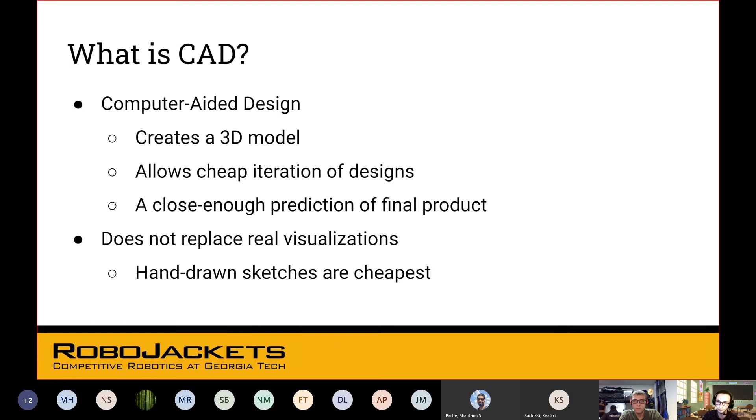So let's talk about some CAD terminology. These things are organized in the order of a typical design — you usually go from a sketch to a feature to a part and then to an assembly. But what do these mean? A sketch refers to the lowest level of the design, usually a 2D element that can be used to define features later on.

Features are 3D aspects of a part — elements like holes or cutouts — and they help define the function of a part. A part is a collection of features and sketches that represent a real thing, like a spring in my pen or a screw in my headphones. And an assembly is a bunch of parts stuck together by defining characteristics, usually by faces or edges — that would be the entirety of the pen or the entirety of the headset.

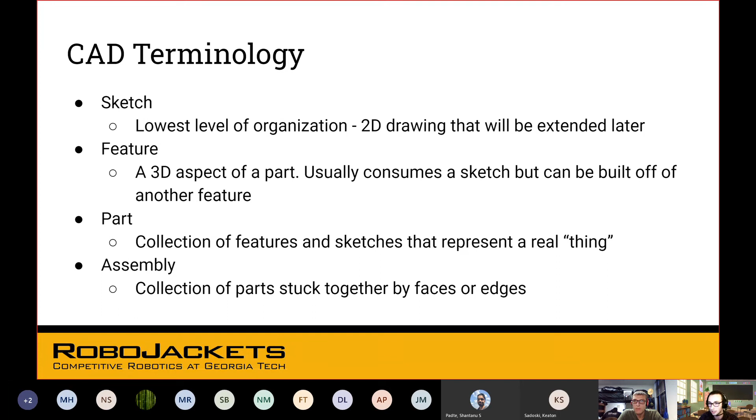So for the CAD space, the workspaces in most CAD software are 3D, so they're XYZ coordinate planes like in geometry. All designs in the world make use of these small, simple geometric shapes like circles and squares. If you think about the defining characteristics of a wheel axle, it would be circles, and plates are defined by a bunch of rectangles. So you can start to build these complex designs with simple geometries that are either built up into something more complex, or taking a complex geometry and breaking it down into a series of simpler ones.

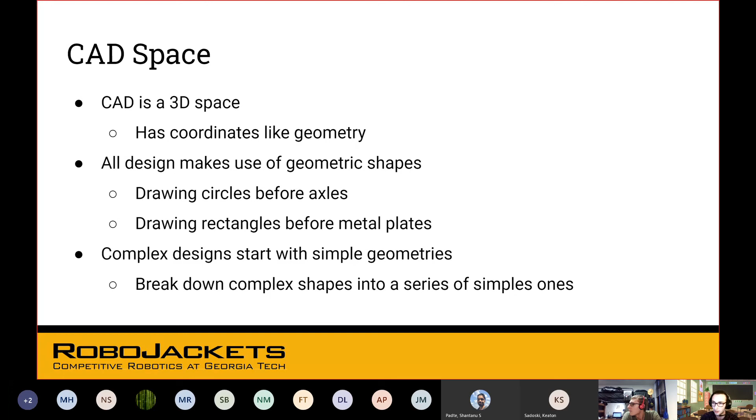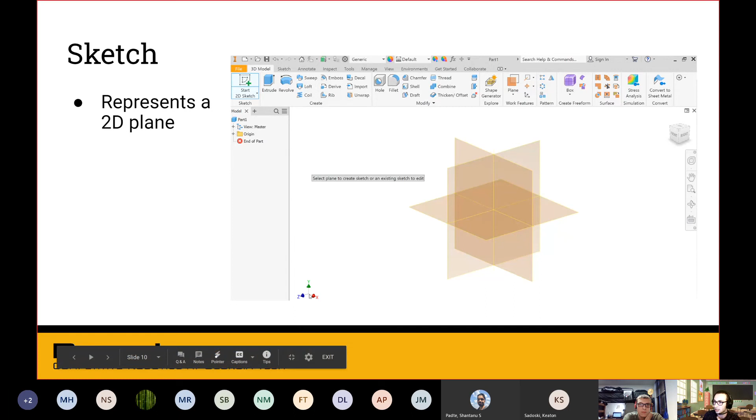Here's an example of the screen you'd see when you start a sketch in Inventor, our CAD software. You'll see this weird looking 3D element in the center - this is a bunch of planes intersecting each other at the origin. In some CAD software they're referred to as top, right, and front. I think in Inventor they're defined by the coordinates that are tangent to them, so this would be like the XY plane.

Sketches are 2D elements, so they need to be put on planes like these - they need to be defined by planes. It's usually a good idea when you start a sketch or start a part to use one of these as your first sketch plane. You just click sketch in the upper left-hand corner, and then click on one of the planes to help define it.

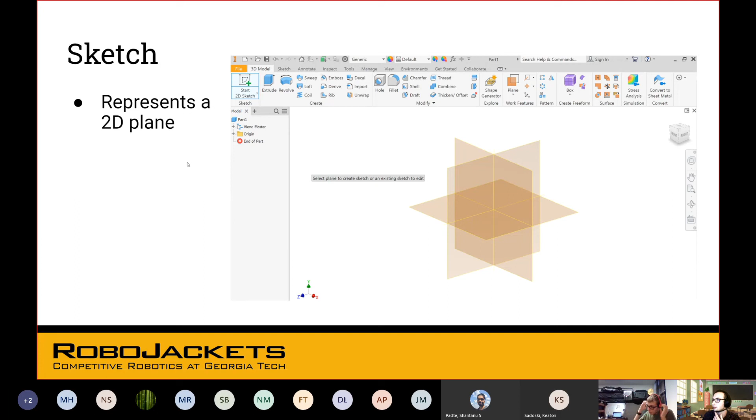Computers are really, really smart idiots - they will do exactly what you tell them and not much more. This is especially true for CAD, and the way you help the computer figure out what's going on is called constraining. Constraining is the act of defining some measurement or relationship in the CAD, like this line is 3 inches long, these lines are parallel, or this angle is 10 degrees. If you don't help the computer understand what you're trying to design, it can really mess you up later down the line.

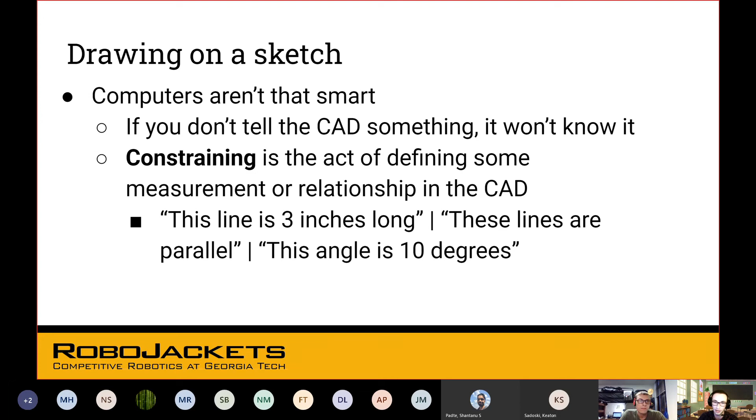This is a quick GIF of the beginning of a sketch, drawing a quick rectangle. You can see they click the sketch option in the upper left hand, and then click on one of the planes that comes up - they click on the top plane, or I think it's the XZ plane here. They grab the rectangle from the top left and define it at the origin, then drag it out to an arbitrary point.

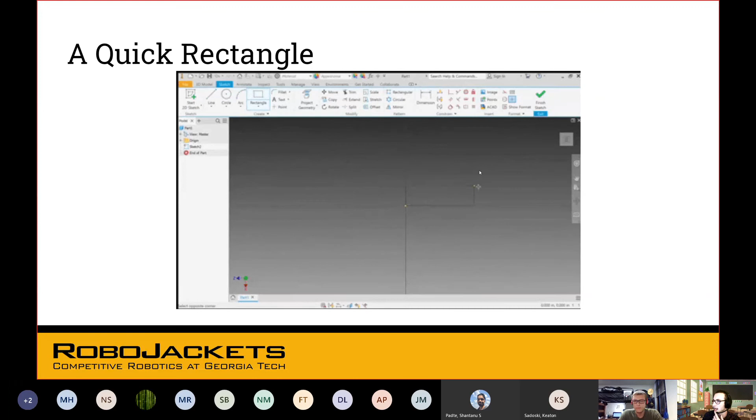You might have noticed the colors of the rectangle were different on some of the sides. This is Inventor's way of telling you what it knows and what it's guessing right now - in this example, blue is known and green is unknown or free. This changes across CAD software and versions, but they all follow this idea: it's trying to tell you, okay, I know this corner is attached to the origin, but I have no idea where this free side is moving. So it could be anywhere right now in your design.

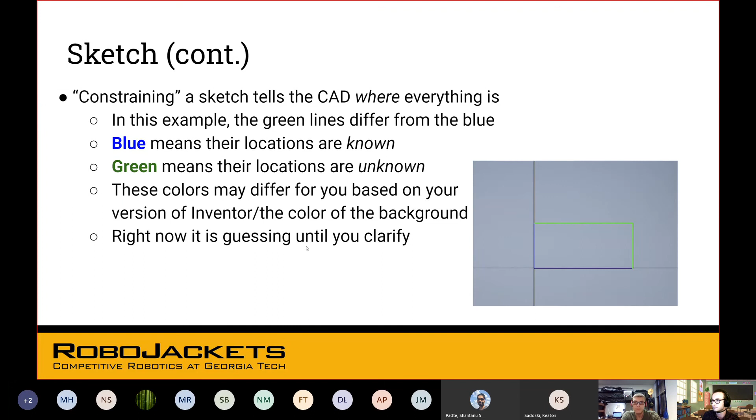There are a couple ways of constraining these things so that you can tell Inventor what they are. These will be covered in other sections, but the important thing right now is that it's important what constraints you use - you want to make sure the way you defined your part is in line with how you will use it. We'll go over some of these later, but for example this is coincident, so 2 points come together, and this is collinear, so 2 lines on top of each other. These all help define parts of the sketch so you can better understand how it works later.

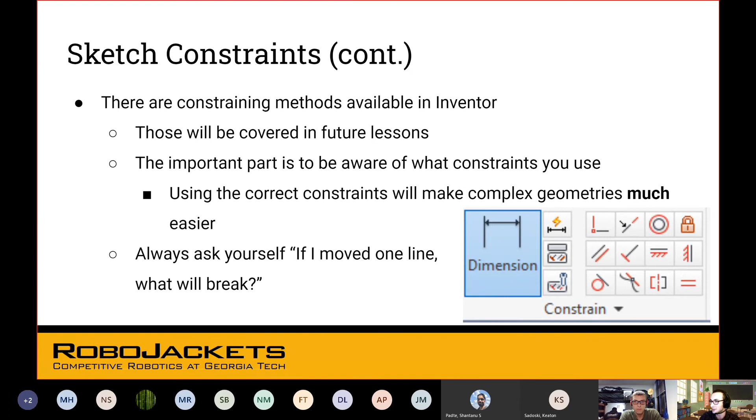A common trick a lot of people use in CAD is: how will a part change if I move one thing, and if it changes in a way I don't want, how do I add a constraint there to fix it? I also often use a trick where if I have a sketch that's undefined and I don't know what needs to be defined, I'll just grab a part and move it and it will break. But Control Z exists for a reason, so we just Control Z and figure out what's going on.

So how do we fix it? How do we get rid of these green unconstrained free lines? One way to do it, for this example, is to define a green element in terms of another known element, like an axis, a plane, or another blue position.

It's pretty hard to see here, but they define it to one of the axes that we know. We know the bottom left corner of the rectangle is on the origin, and we have this line that follows that, so we know that is on this plane. We say the height distance from the bottom line to the top line is 3 inches, and it becomes blue because now it knows where that height is.

We still don't know what this one on the right side is, so this dimension is still free, so it could slide. A good flow to follow is: you want to sketch, then constrain the element in different ways like parallel or perpendicular, coincident, anything like that, and then dimension it. This is the best practice to avoid errors in the future.

Pretty often in RoboJackets, you're doing something, you're in your flow trying to figure out what's going on, and something breaks and you don't know why. That's a common occurrence that has happened to all of us. If there's something going on with your CAD and it's not constrained and you don't know what it is...

You can always use show degrees of freedom by right-clicking on the sketch, and it will show you the ways that the sketch can move in red arrows.

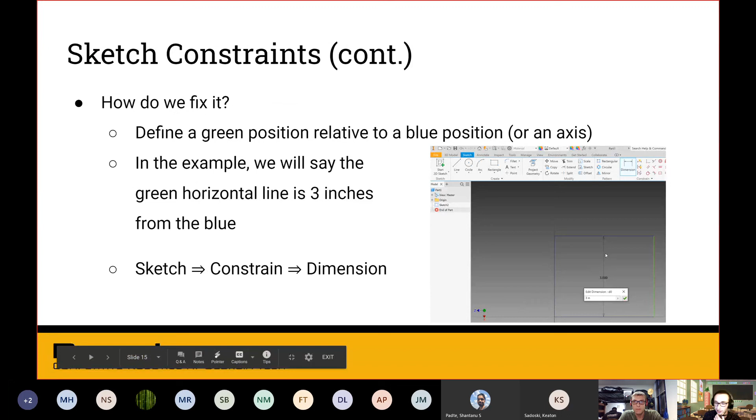So all I would have to do for this one is right-click on the sketch and ask, where can it move? For this, if I right-click on this sketch and say show me degrees of freedom, it would show that you can slide in this direction right now because you haven't told me how wide you want your rectangle to be.

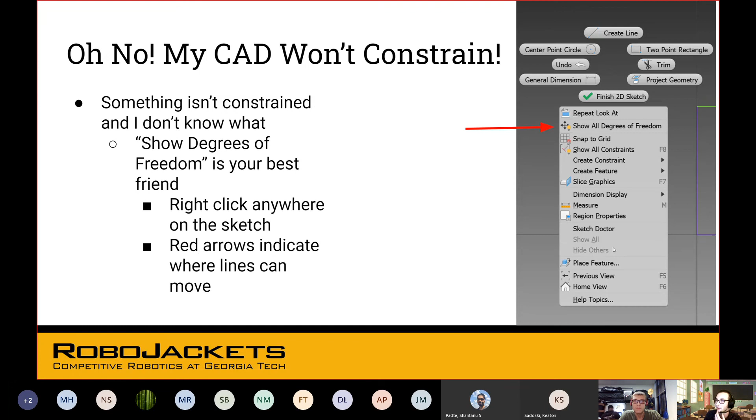That's a really useful tool. Fun fact, I didn't know about it until we went over training for this, so that's fun. So I'm going to be using that now.

Okay, so we talked about sketches. The next thing that we do is we use the sketches to define features. Features are 3D elements of a part made by manipulating a sketch.

Some common features are extruding. Extruding is the one you'll probably use most, very, very common. Imagine dragging the piece of paper with the sketch on it in one direction to make a 3D shape.

Another way to look at it: did any of you have those Play-Doh toys where you'd stuff a bunch of stuff into it, then squeeze it and it would come out as a long star or a moon shape? That's very similar to what an extrude does, where you just take the profile and stretch it.

Another one is revolve. This is really similar, except when you take the sketch, you rotate it around an axis instead of just bringing it up, so it makes a circular shape. I don't have a fun Play-Doh one for this, but maybe I'll think of one.

Sweep - I don't want to spend too much time on this, it's pretty uncommon. It's when you drag a profile along a curve. That's good to make something like a paperclip - you take that circular profile and drag it along the curve that would define the bends in the paperclip.

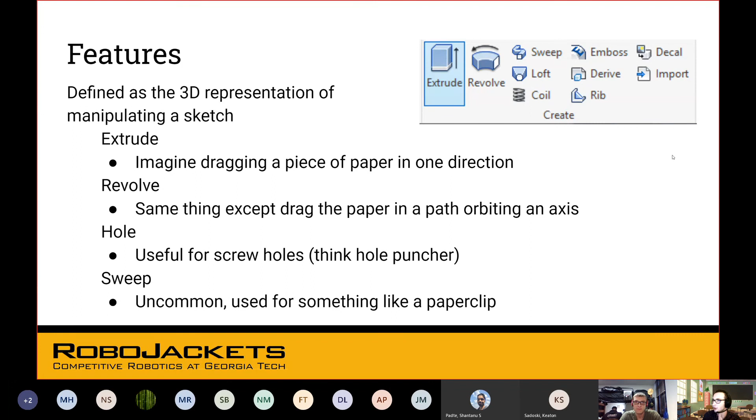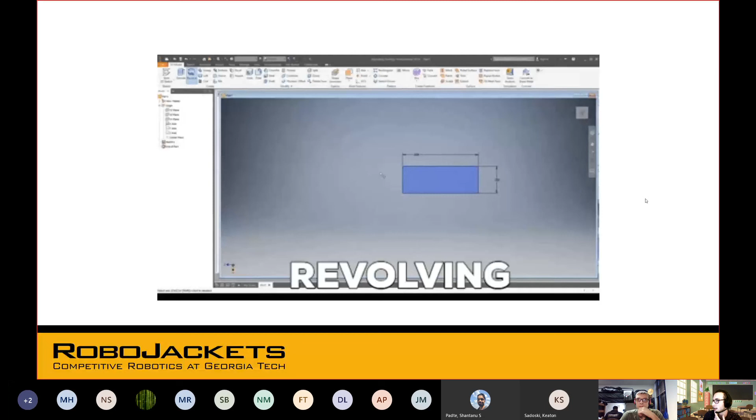This is revolving, right? So they select the profile they want to revolve. They then select the axis they want to revolve around. And then there it is - it rotates around the axis to form a circle.

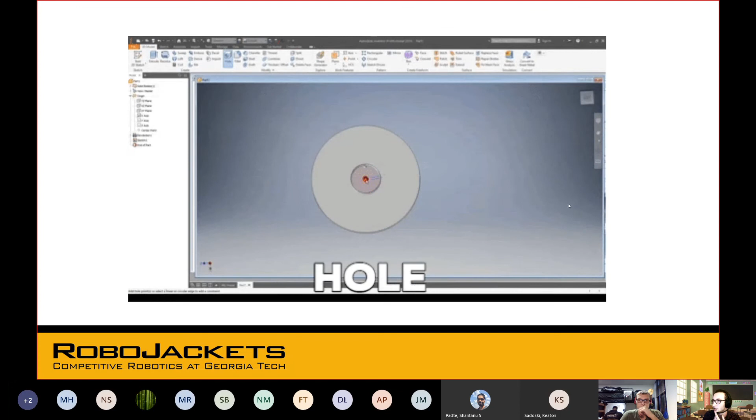I doubt they show sweep here. Oh, they do show hole though. Nice, so the hole tool defines a diameter of the hole you want and the depth. So they have the base defined, and they just click on the center of the circle - that's already a point defined by the axis. There's a little point here. They click on it, and now they have a hole there, defined by the axis.

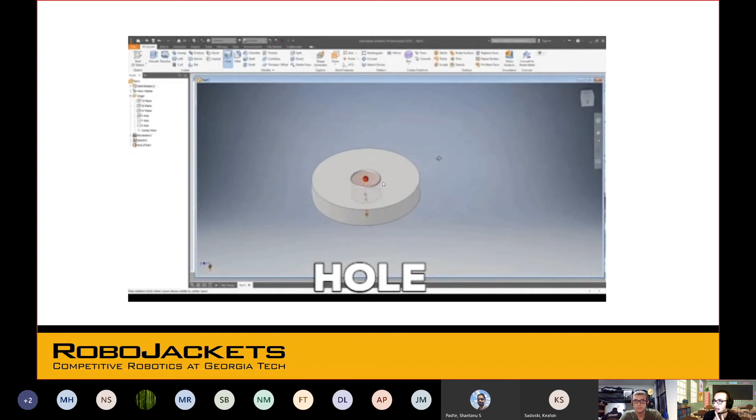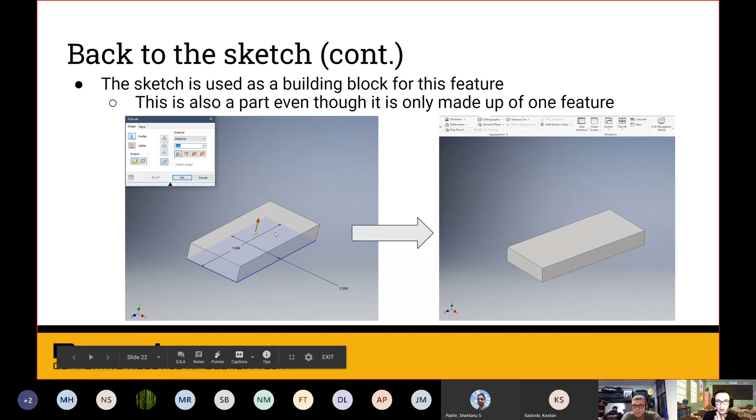Creating a rectangular profile with the previous sketch we get - okay, so this is back to the sketch. The building block of features are the sketches, right? The first thing you focus on is the sketch - you have it define the features. So they have a fully defined rectangle here. They extrude it up into the square or rectangular prism, and now they have a base for more features, more sketches, things to build off of.

So parts - these are just a collection of features. They will end in an IPT file, which stands for Inventor Part File. And now you might ask, where does the T come from? It's probably from the T in part, but that does keep me up at night - like, Inventor Part File with an F.

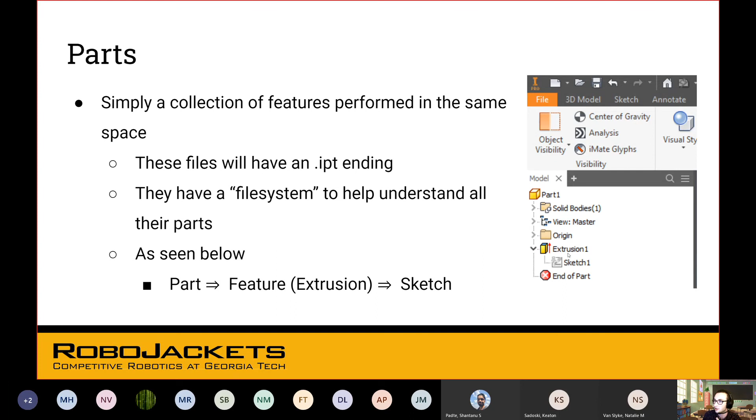Yeah, I don't know. So there's an example model tree on the right side here. This helps you keep track of your designs in CAD, and they're organized in like a folder format, which we'll get into a little bit later. But basically, the largest thing that holds it is a part, and then under that in the folder would be like an extrusion or a feature - so this could be an extrusion, a hole, a revolve, anything like that. And then under that feature is the defining characteristic, which would be the sketch. So the sketch defines the extrusion or the feature, and the features define the parts. You can go up like that as well.

So this is where it all comes together, and you get to see something like the bot we see on the right, which looks like an Undercutter from BattleBots. Keaton can correct me if he knows the name of the bot. It's a Valkyrie, right? It's Valkyrie. Okay, there you go - if you're on BattleBots, that is one of the bots from this past year.

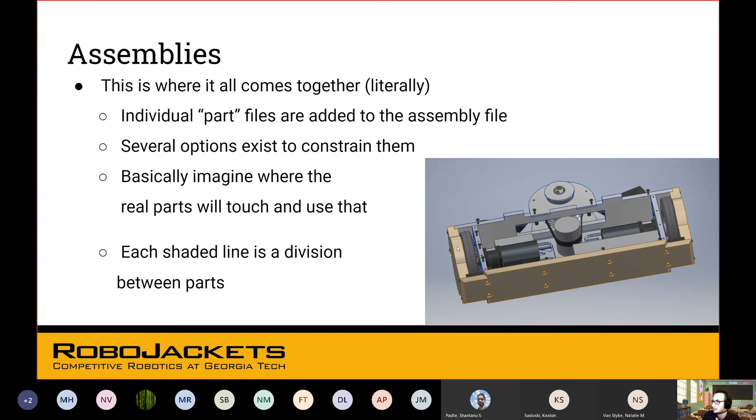So we take all our part files and we constrain them together, and there are a lot of ways to do that, which we will cover in another session. Almost always the best method for constraining a part is based on its real interaction with other parts. A good way to follow it is to imagine where the real world parts would touch and use that as your defining feature. If you look at this example, you see some shaded lines between different elements - those are dividing features of parts. So this back plate would be a part, separate from these side panels because you can see these separate lines, and they're separate from the front panel as well.

So just an overview of some of the things we learned today. We'll be using a CAD software, a computer-aided design software called Inventor, Autodesk Inventor. The best design flow is to start with a sketch, constrain it, and then dimension it. We want to use constraints to talk about its design and why we want it there, then dimension it to fully define it. Then we take the sketch and define a feature with it. We can continue defining features to create a part, and then take those parts we've created and assemble them into a final product.

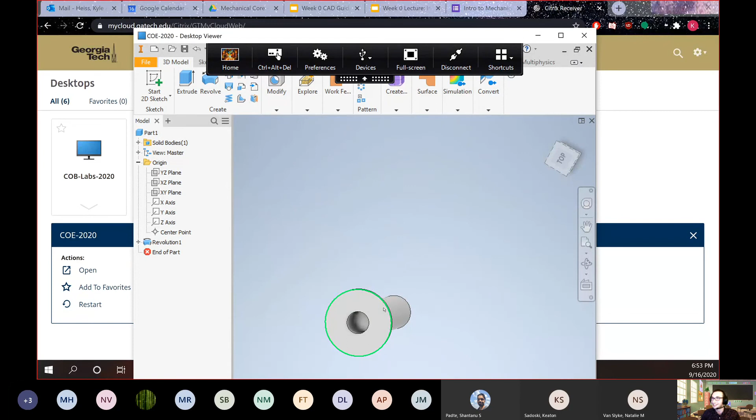There you go, and you see I already have the part made. We're done, that's it. No. But if you go here, I'll close Inventor so I can show opening it up. If it will let me. Please. I just want to close your program. There you go, so I'll say no, because we're going to do it together.

You should see this screen, or one very similar, with the gray background. Just double click on Autodesk Inventor and it should open up. So back to the CAD guide. If you have any trouble with that, let me know, or post in the chat, and Sean and Keaton will help you out.

So I showed this: you go to mycloud.gatech.edu, you click on COE 2020, you open it up, and we get ready to go.

If you want to do a local installation on your computer, I don't do it because it's too much space for me. But if you have a fast computer and you want to always have access to Autodesk, just go to this link. If one of you guys can post in the chat, if you haven't already, please do.

You go to that link, you create an account. It could be your personal email, it could be a gatech.edu, it could be whatever you want. You download the educational license for your system, and we'll be working on 2021 this year. It's a pretty beefy file, and Autodesk also installs a lot of material packages and other elements onto your computer. So saying it takes several hours to install on some of the dorms' Wi-Fi is an understatement.

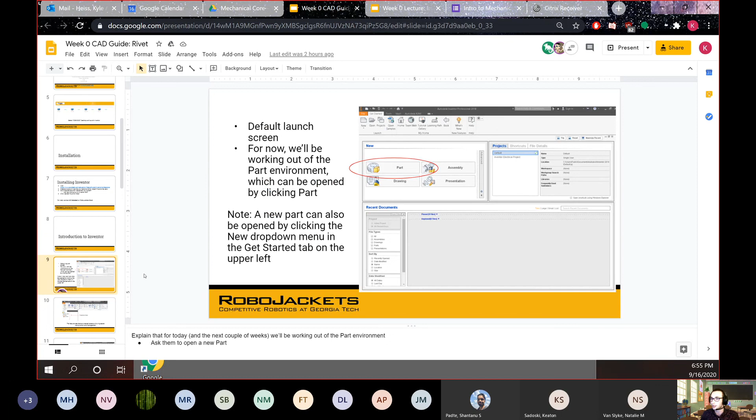Okay, I'm going to take that as a let's go right into it. So how am I going to do this? I'm going to have my CAD up on this screen and the presentation over here.

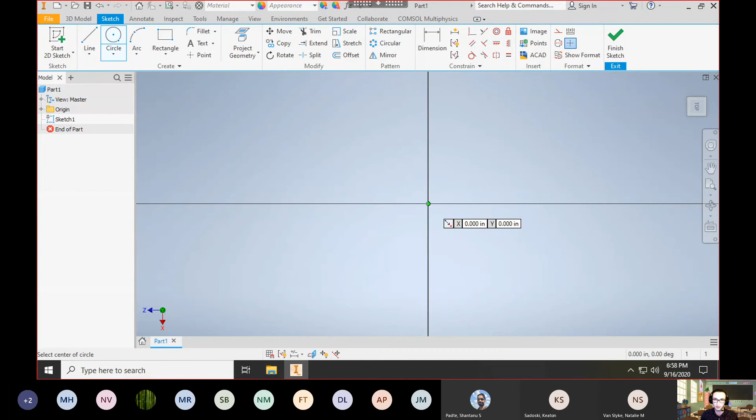We're going to click on the origin. So you see how I'm just floating around in space, but when I get close to the origin, it clicks in and it's green. That's Inventor's auto assist, and it's telling you, oh, this is where I want to place it. I want to place it at the center of the screen. So I'm going to click once it's green.

You can see that it allows me to drag and define this dimension freely. So I'm going to make it real big. It is not dimensioned right now, right? So we see that it's blue. So we said the blue is the, well, actually, hold on.

I'm going to dimension it. And we're going to set it as, let's see what it says, 3/8. So if you didn't follow what I did there, I clicked on dimension up here.

Okay, so in this version of Inventor, blue is undefined and black is defined. So you saw right here, it's blue. That means this is free to move. I haven't set it to be a dimension, right? It knows where its origin is, but I don't know what its diameter is.

So I'm going to go up here to where it says constrain, right? And I'm going to add another constraint in order to make it fully defined. I'm going to click on this, and I'm going to set a dimension. So we're going to set it as 3/8 inches.

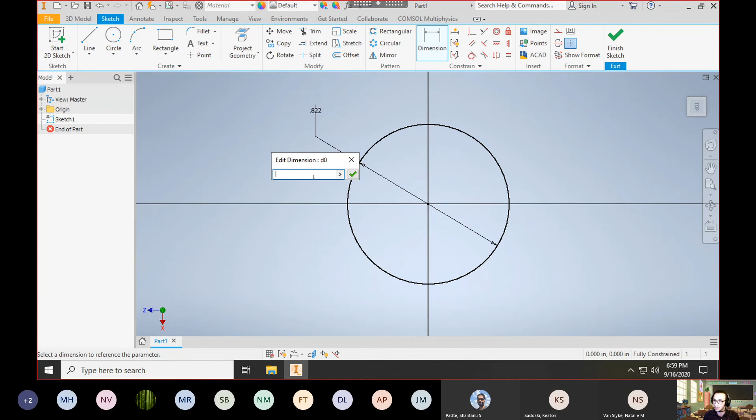And Inventor is really dope. So if you don't know what 3/8 inches is in decimal, you can just be like, oh, 3/8 inches. And there you go, it's got it for us.

The next thing we're going to do is we're going to define another circle inside. So we're making like this hollow tube that's at the center of a rivet. So we're going to grab another circle. We're going to again put it at the origin. And this time we're going to put it inside the axis of the circumference of the other one.

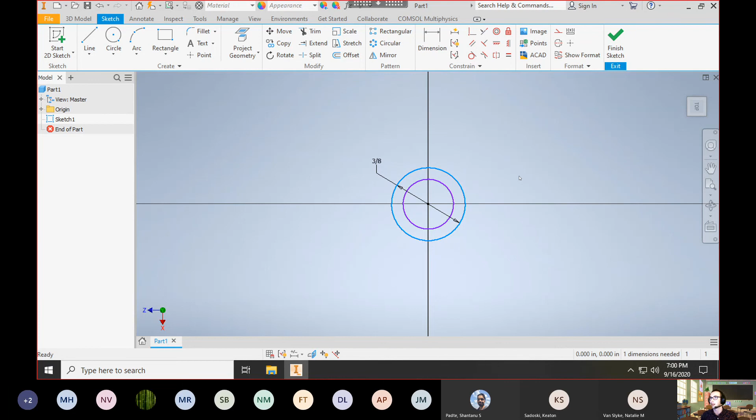Now, so remember, I said there were multiple ways to define a feature. You can either define it by its distance to axes, planes, or points, or you can define it by other already defined points. So for this one, I know the thickness of the rivet I want.

I want it to be a 1/16 inch thick rivet. So instead of defining it as a diameter, I'm going to take the dimension and go inside, clicking on the smaller one first and then the outer one. Now you see I've defined their distance to each other of the two outer profiles.

So I'm going to go in here and do the same thing. I don't need to know what this decimal is, and I'm going to define that distance. You can do the same thing by clicking on the outer one and then the inner one, whatever you want to do.

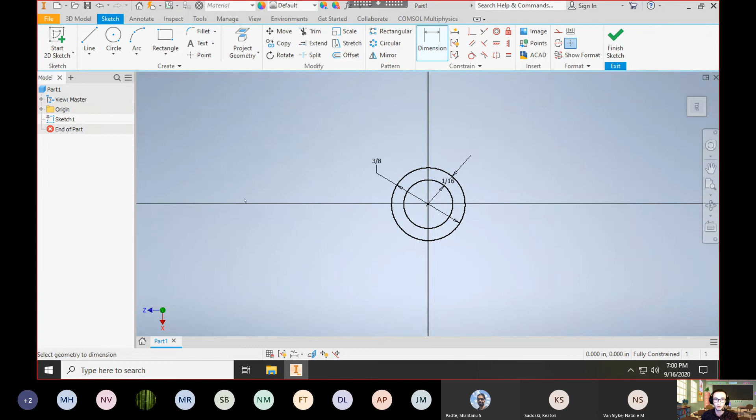That is going to define the inner tube of our rivet. Once I'm done with the sketch, I go up here and click Finish Sketch. It's not going to let me extrude the profile until I finish the sketch. So I say, I'm good, this is what I want. Check it over, I'm done.

Next thing we're going to do is make the tube portion of the rivet. So I'm going to click Extrude, and the first thing Extrude's going to do is ask me to select a profile - what I want to push out with Play-Doh, right?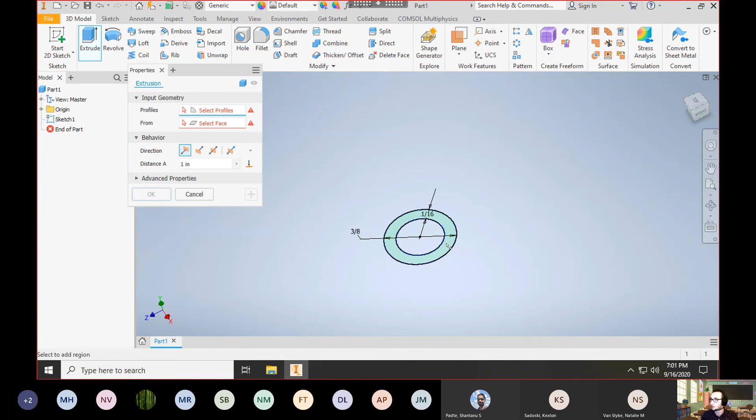So you see that I have an option to do the inside. I don't want that, I want to do the tube. So I'm going to hover over just the part that would make the tube, and click it. It's going to ask me for a distance.

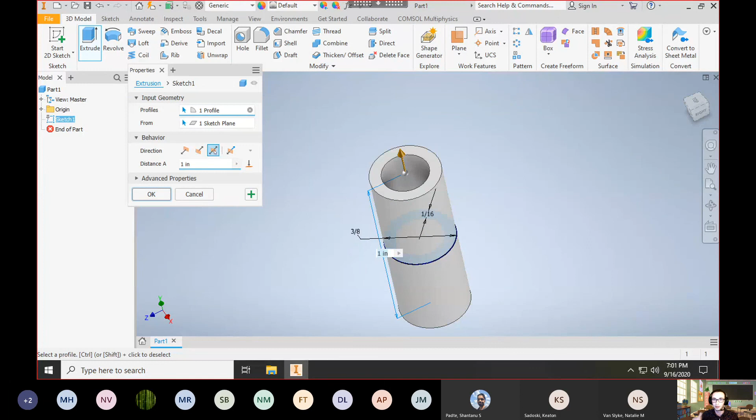So there are a couple options here to go over. One of them is just the direction of most ease, so it's wherever you're looking - like for right now, it would go up. If I want to flip that, it goes backwards, right? So this is positive direction in the positive y, this is negative y, this is both in the same equal distance. These aren't really important right there, and these are different distances.

You're going to want to click on this first one, the positive y, and your distance is going to be 1.8 inches - a big boy, a big tube.

Next, we're going to make the top of the rivet, right? So what actually contacts the material.

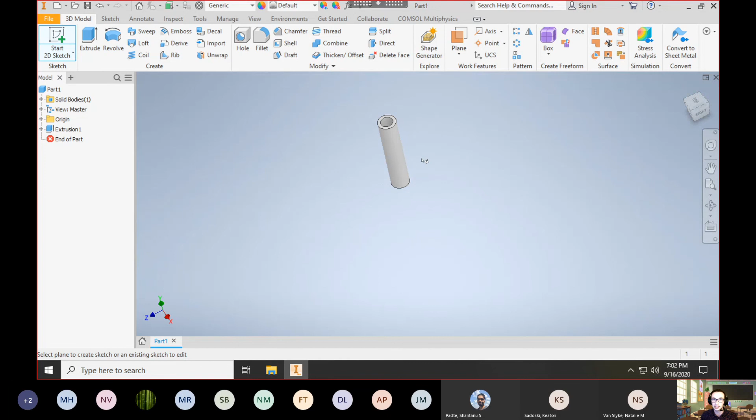So again, I said there are different ways to define elements and sketches. They have to be defined by a plane. So every extrude or every feature also defines other planes that can exist. So what I'm going to do is click on the sketch, but instead you see those origin planes no longer come up. Instead, I have to define it based on - or instead I'm going to define it, you don't have to, but I'm going to define it by planes that already exist on the part.

So I'm going to click on the positive y top of the part, like that. And now I can sketch directly on this element. So you see how it could start to build, how you could start to define more faces and get more complex parts.

For this, we're going to use something called project geometry. So if something already exists that has like an outside profile or an inside profile, you can project that onto the sketch plane instead of trying to sketch it again, right?

You see how it becomes yellow? That yellow means that geometry has been projected onto the sketch that I'm currently doing. I'm going to click out, or hit escape to get out of the project geometry thing.

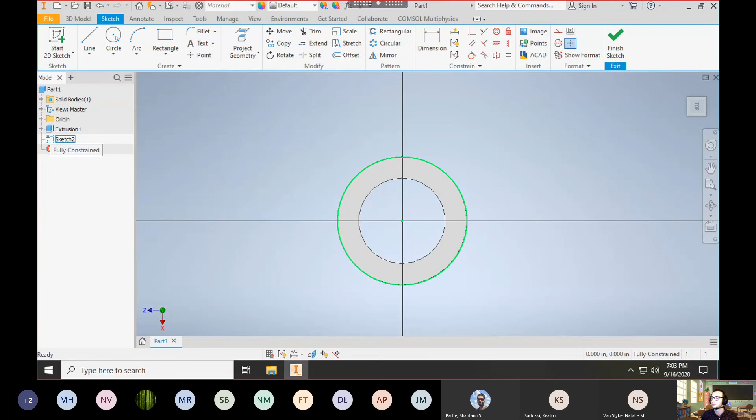And I believe the next thing they want us to do is to draw another circle. So I'm going to go to the origin again, wait till it clicks green, and pull out. This one's going to be 3/4 inch.

So I'm going to draw the circle, hit escape to get out of the circle drawing, hit dimension, and go to 0.75 inches.

So now you see there are a couple profiles we've made here. There's this inner profile on this sketch face of everything within this projected geometry. There's also the profile between these two circles, and that's the one we're going to want.

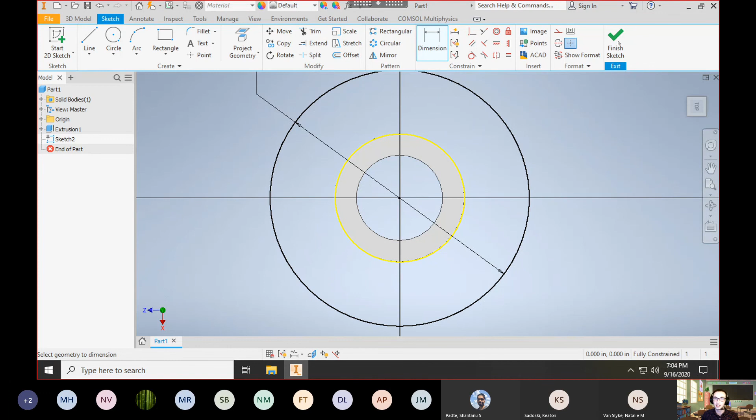So we're going to exit the sketch. We're good, we've done it, we're killing it. We're going to click extrude, and the first thing it's going to ask is what profile do you want to extrude - what Play-Doh do you want to push? You're going to click on the profile I mentioned before, the one defined by the space between the two circles. Oh, that's not right.

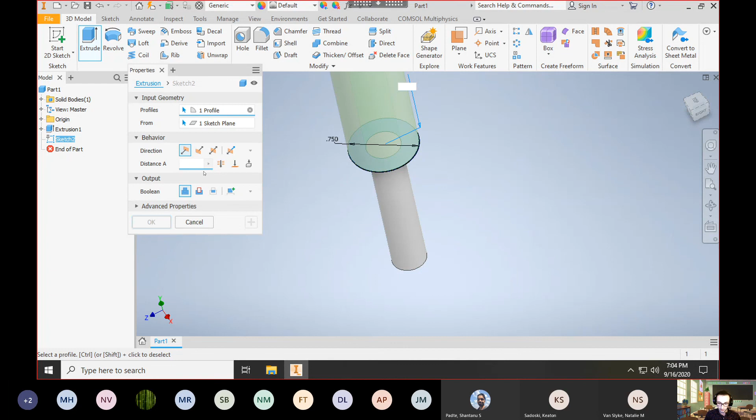We're going to select the distance to be 1/16 of an inch. That's not what we want to do. If you ever accidentally hit confirm, you can just go over to the model tree, right click, and then edit feature. If you want to edit the sketch, you can also do that, but just click edit feature.

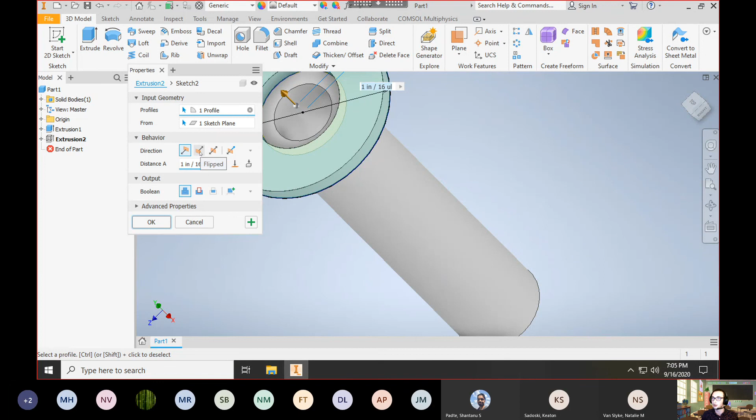So this doesn't make any sense, right? Because I've extruded upwards, and the part right here at the corner would be like 0 thickness. So this doesn't make sense to do. So what we want to do is change the direction of the extrude - I showed how to do that before. I flip to the -y direction. So I flip it, and now it makes sense.

Now there's some overlap, this could actually be made, so I'm going to click OK. And there you go, you have your first CAD part, a rivet. Yay, I'm happy that I did it. I was really nervous, everybody, that I couldn't - I don't use CAD that much - but we killed it, we did it.

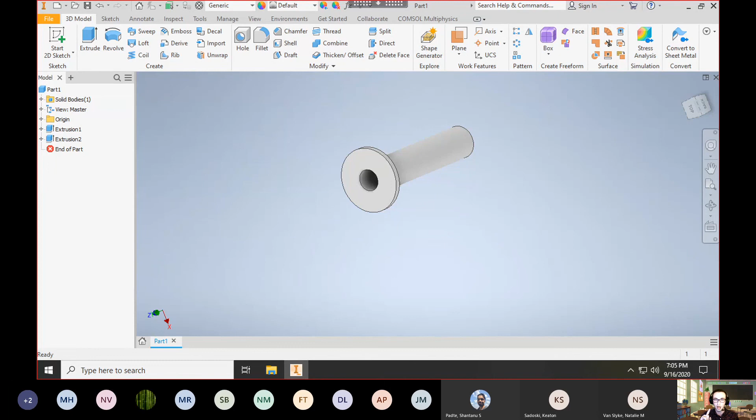So I'm going to show this. This is one way to do it. I'm going to show you another way to do it that might be interesting to some people, or not, who knows. So I'm going to click all the extrudes and delete them just to get back to our base part. There's no features in here, no sketches, nothing that defines the part. And this time I'm going to use a revolve instead of a couple of extrudes.

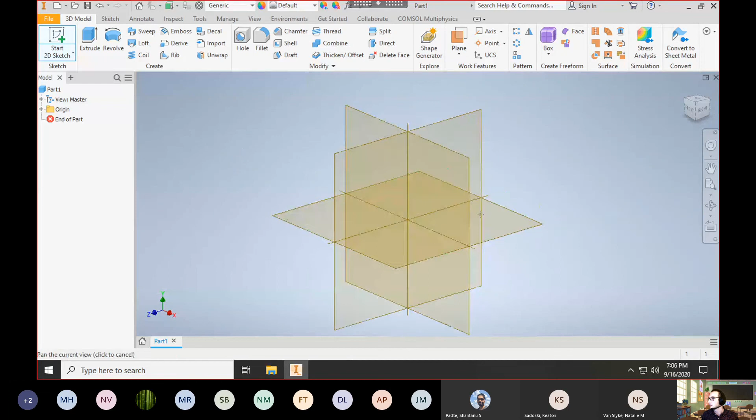So I'm going to look at this, and instead of the XZ plane that we used before, we're going to click on the XY plane. So remember what revolve is - we take the paper and we revolve it around the axis in the center, the axis in the center.

And so the first thing I'm going to do is make a construction line down the center, down this line here. Construction lines are used to help define characteristics or dimensions of a sketch, and usually they're used just to help the CAD - they don't have any impact on the actual features of the design, just to help the CADer.

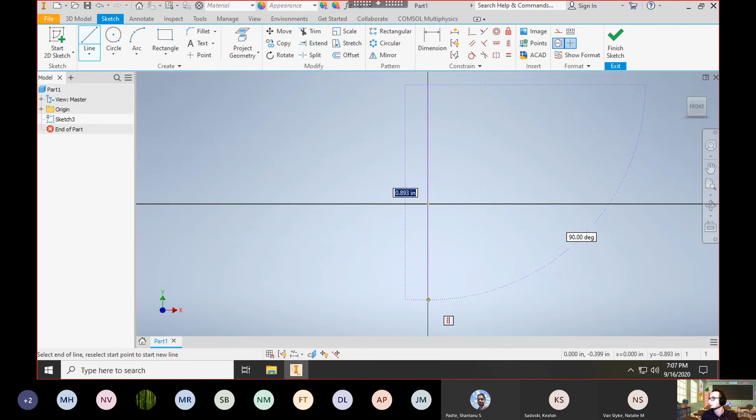So let me be more specific what I did there. To make a construction line, you can see there are formats over here - the only thing that changes between a line and a construction line is that it's dashed. So I'm going to click this button right here, the center line, and drop one right here. That's going to be a construction line to help us figure this out.

Next thing I'm going to do - if you rotate incorrectly, there's a viewport dialog over here that allows you to flip back to any dimension or view that you want. You're going to take a line and just sort of draw like a square element. Oh, this is actually not how they want you to do it.

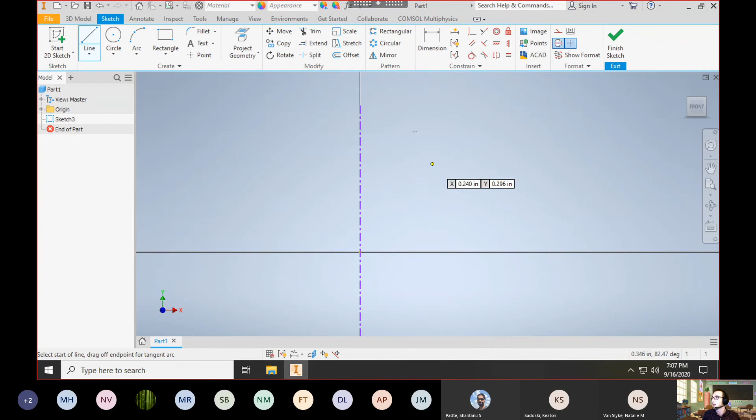That's all right, we'll do it free. So you're just going to draw a thing here, in the rough shape. Oh, I forgot to turn off construction or center line. You're just going to draw it in the rough shape of that profile, as if I was to cut it in half twice, right? So let me show you what that means.

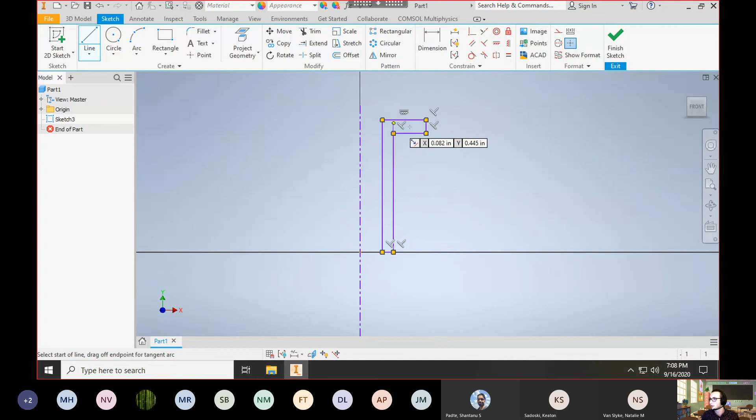I'm just going to take a rough profile of the rivet. So this is what it would look like if I were to cut it in half, and I didn't have this left side.

If your lines come up wonky, you can always make them parallel or perpendicular using these two features up here. So parallel is this constraint - you can always hover over something and it will give you a little dialog box of what to do. And then perpendicular is this constraint. So I can make two lines with a right angle.

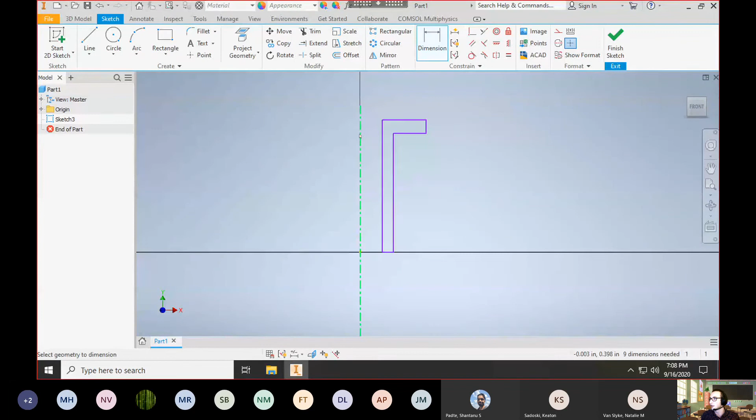And then all we have to do is define some features. So I want to say from the center line, from the center of the part to the outside of the part - and look what Inventor does here, it lets us know that this is the whole dimension of the part. So let's look at how big that would be - how big was that for the other time? It was 0.75 inches, or 3/4 inches. Oh, it got big.

What are some other features that we remember? So we know that the distance from the center of the part to the outside of the part, or the total distance of the outside of the rivet, was 3/8.

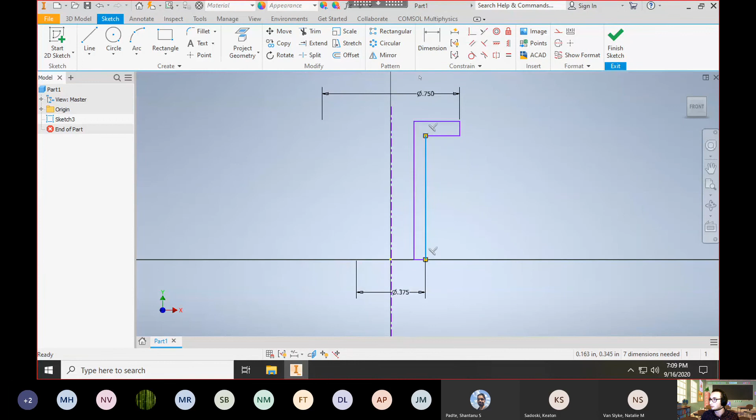And we're in inches, so you don't have to type in inches here. We also know that the dimension from the outside of the rivet to the inside of the rivet face was 1/16. The last thing we know is that this dimension, the distance between the two pieces at the top, was also 1/16.

And then it looks like I need to define the center line. Let's show what I did before. So I click on this and say display degrees of freedom, because I don't know what's wrong with the sketch right now. It has dimensional freedom in every direction, which means I'm not constrained to an origin element.

So I'm going to take this collinear constraint, which puts two lines on top of each other. I'm going to click our center line and drop down the origin over here, because I want to define it to this up and down line.

I'm going to hover over this. Oh, no, you see that's this dimension. So the x-axis isn't right, the y-axis is what I want it constrained to. So I pop it in and you see that it all becomes... oh, its height is wrong too. Okay, well, we'll do that too.

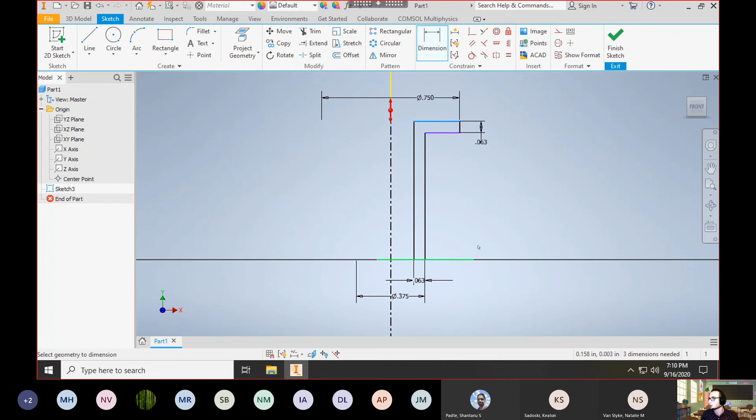We'll say collinear, grab this, and this time let's hover over them. It's not the z, because we can't see that. It's not the y, it's the x we want it constrained to. And then we want its total height to be 1.8, which is what we had before, right? Hopefully that's what we had before. Yeah, 1.8. Then now that we have our sketch, we're going to finish it.

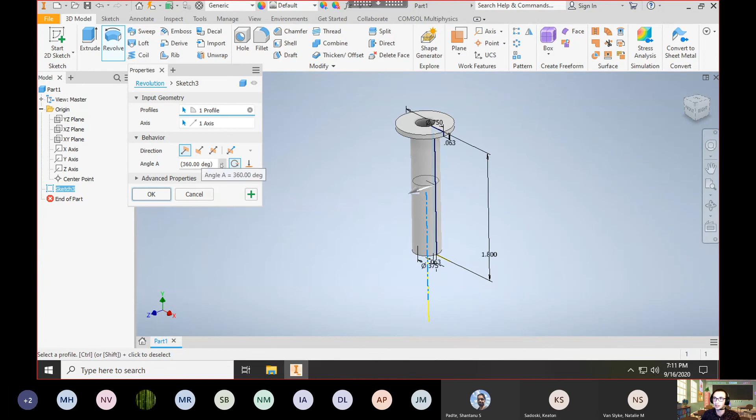And we're going to revolve it. So we're going to go back to the 3D model, take revolve, and it just does it for us, right? So there's a bunch of different things you can change here, the angle of the revolve, everything like that. But we want it to go all the way around.

So with two actions and one feature, we've created the same part that we did before. I would say this was a harder way to do it. I would probably, if I was CADing, do the two extrudes. But it's whatever you think is the best way to do it and what helps you most later on. Maybe this rivet needs to have a lot of different elements change, which are defined by the sketch. That would help us if we did it this way.

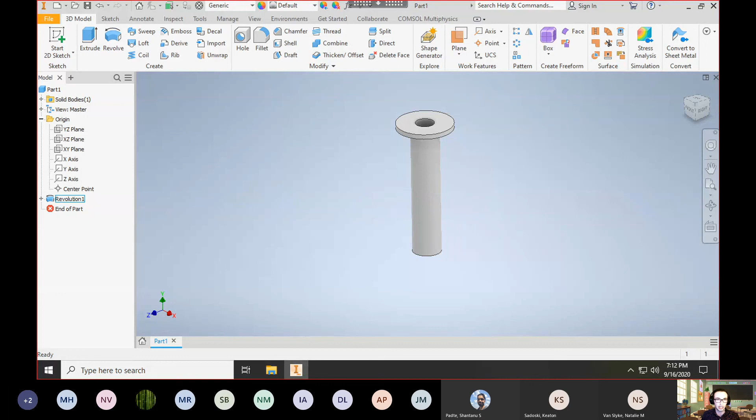I think the way they have you do it in the slides is actually easier than that, if I had to guess. But yeah, thank you guys.

Was everyone able to follow along?

I was able to follow along on the first way, but on the second way, once you were doing the constraint thing with the freedom of movement, I got lost or I got behind.

Yeah. So if you get a chance, look at the slides. I'm fairly certain I did it actually incorrectly based on what they want you to do. Let me take a peek really quick.

So they have you define a box for the rivet, and then they do a sketch internally to that. This is also a fine way to do it.

I'm going to be honest, I do not remember how to do construction lines. Keaton or Sean, do you remember how to do this? That aren't center lines? Oh, shit. Sorry, I was not paying attention, I was in a different chat. You're okay, no worries. Yeah, sorry, what was the question? Do you remember how to do construction lines that aren't center lines?

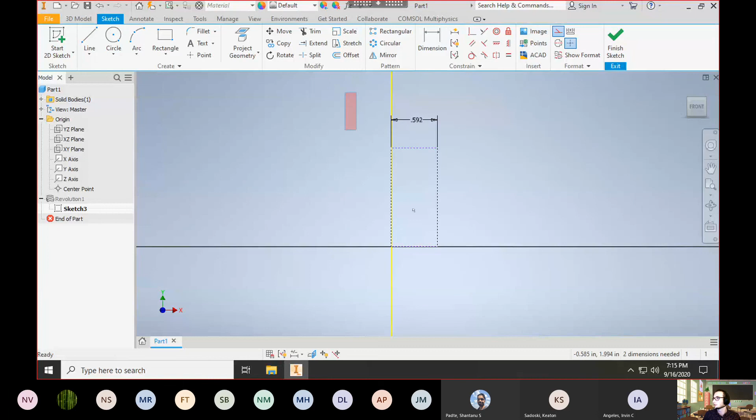There you go, okay, so let's do it again then. Thank you for telling me that. So this is the construction line up here, it's this little red angled thing.

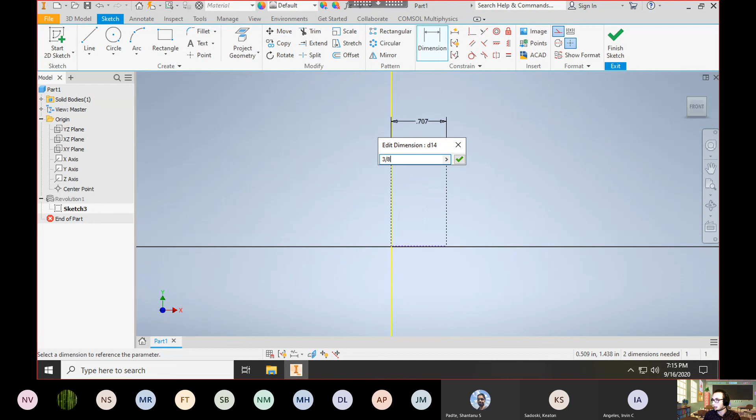Then you can take a rectangle, and we're going to use this as a guide for the rest of our CAD. So we're going to make a rectangle that is 3/8, and 1.8 tall. These are the outer dimensions of our rivet, right?

One thing they haven't done is I would need to define, I'm going to go to this collinear constraint. So this is where you got lost, right? Grab the collinear constraint, which has two lines, one red, one black with a little dot on it. I'm going to grab the bottom of it, and put it on this axis, right? And so I can't directly click on the axis.

I have to go over to this origin thing. You might see it where it's like this, right, so it's all closed up. We're going to open up origin, because that's where the axes, dots, and planes that define the origin are located. We're just going to hover over which of the axes we want. I see right immediately that it's the x-axis, and I'm going to click on that.

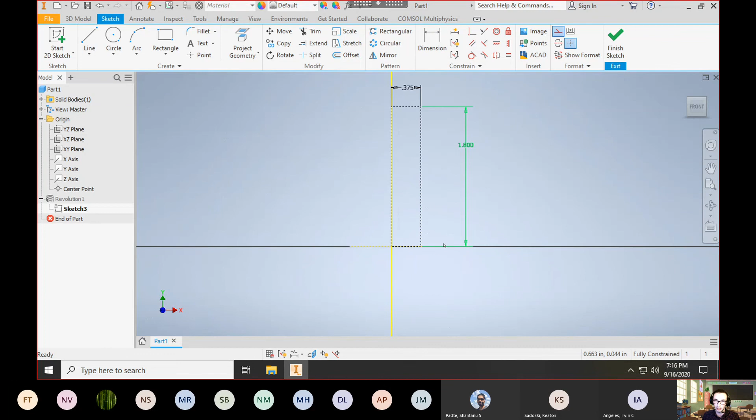Now we have this bounding box that defines the CAD. We're going to do very similar to what we did last time. We're going to draw a line here, basically the profile of the rivet, and then we're going to revolve that around. I'm not going to do that again because it's pretty much the same thing. Just use the construction lines to help you from the outside bounds.

Yeah, hopefully that helped, did it? Well, let me know, and I'll try to explain more if I can. Yeah, I think it helped. Okay, awesome, thank you. You're welcome. Yeah, I'll stop sharing my screen, anything else?

Was that too much? Was that too slow, too fast? What do you guys think? A little fast, I think, because when you say something and then we try to do it, I already blank out, and then you already moved on to the next step. Okay, I will keep that in mind going forward, thank you for that, appreciate it.

Yeah, okay, so definitely knowledge of other CAD softwares is going to help you during these portions. There's still a lot to learn. If you are familiar with CAD, there is another series of slides which hold an advanced model, basically, with more part formations, more development. I think they have some, you do some exterior plane generation as well.

If you would like to follow those, I'm not going to do that here because it's going to take too long. But if you would like to do those as well to give yourself a challenge so you can keep learning, I will drop it, or if one of the guys could help me find it real quick. Hold on, give me a second. CAD guides, week 0 advanced. Yeah, it's the Empire State Building. That's right, so if you know a little bit about SolidWorks or any other CAD software and you want to challenge yourself, try that out. It shouldn't go too deep, but it should be enough to maybe keep you entertained.